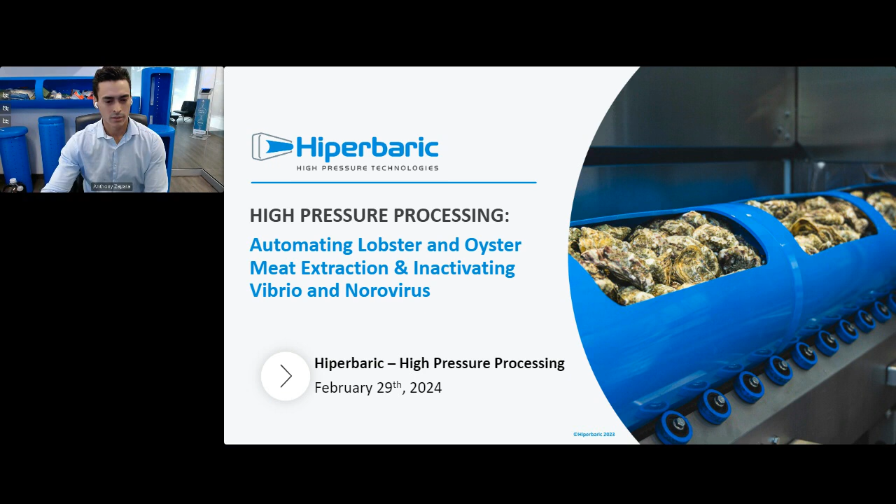So the agenda for today is I'm going to quickly highlight some processor seafood challenges that we've seen in the last two years. I'll give a brief introduction to how HPP technology works. We'll then dive deeper into numerous important information that you need to particularly have for the processing of lobster and oysters. I'll then share some commercial examples that exist on the market, and then we'll end it with an exciting shucking demo here at our pilot plant showing the meat extraction of oysters.

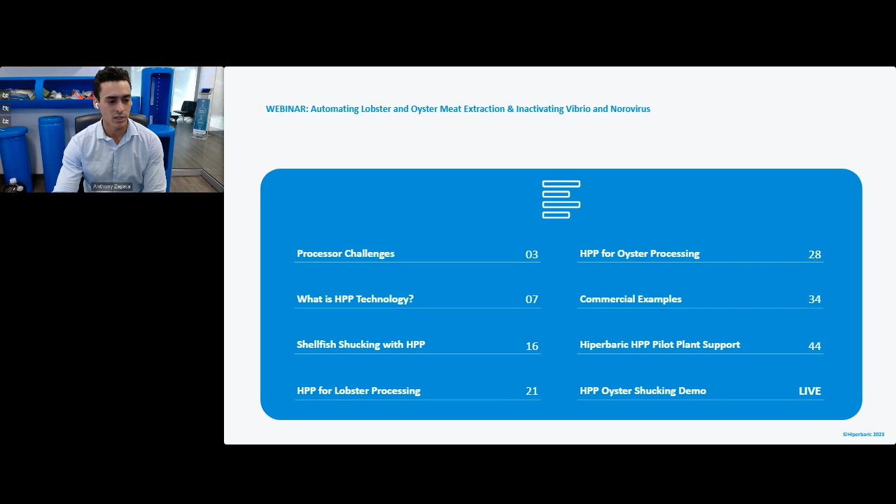Before we start talking about HPP, I wanted to point out two major processor challenges that we've seen in the last two years, starting off with the raw oysters, the challenges around raw oysters.

There have been numerous recalls specifically this year around Vibrio and Norovirus. Looking at the data, according to the CDC, 52% of foodborne illnesses are associated with norovirus here in the USA. When you look at Vibrio, there are more than 2,800 contaminations with this specific virus here in the USA. If you combine both of these, there are over 1,000 deaths.

So it's honestly a big challenge for some of the raw oyster processors dealing with this product. The other being labor, sourcing labor. Right after the pandemic, we've been reached out by numerous seafood processors, not only in the seafood space, but also across the board within the food processing sector. Sourcing labor has been a critical challenge.

If you take, for an example, an average shucking operator, which on average can shuck about a single oyster in 30 seconds, that's about 120 oysters per hour. And if you compare that with HPP equipment, our range of HPP machines, you can process between 10,000 oysters up to 95,000 oysters per hour.

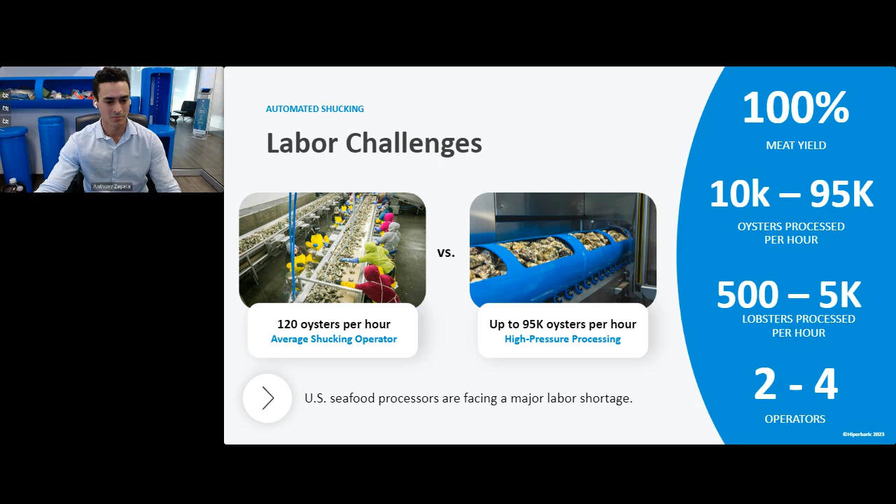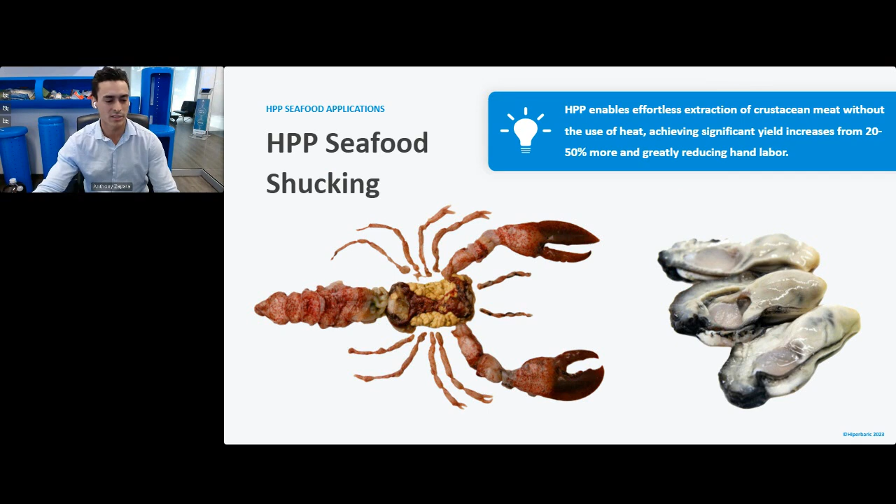So like I mentioned, HPP offers a solution to seafood shucking, both for crustaceans and oysters, and we'll be taking a deeper dive into that throughout the webinar.

So now let's take a step back and explain what truly is HPP technology, which is, in short, high pressure processing. HPP is a cold pasteurization method that uses both high pressure and cold water. It's based on the principle of isostatic pressure, meaning pressure is being applied at all equal sides, generally for post-packaged products. I'll play a quick video to show you what that looks like firsthand.

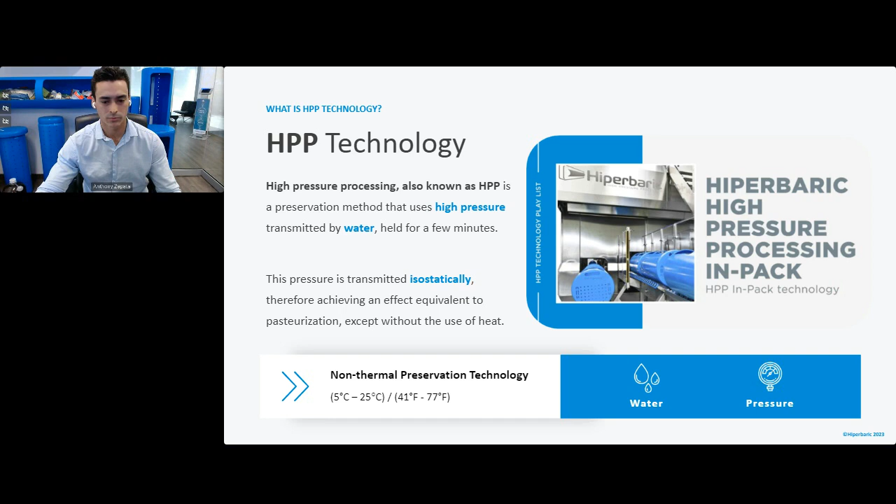High-pressure processing by Hiperbaric.

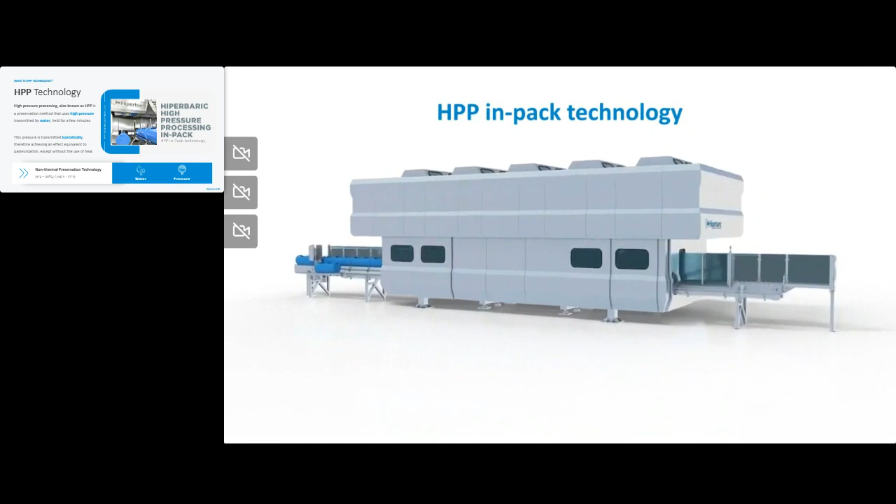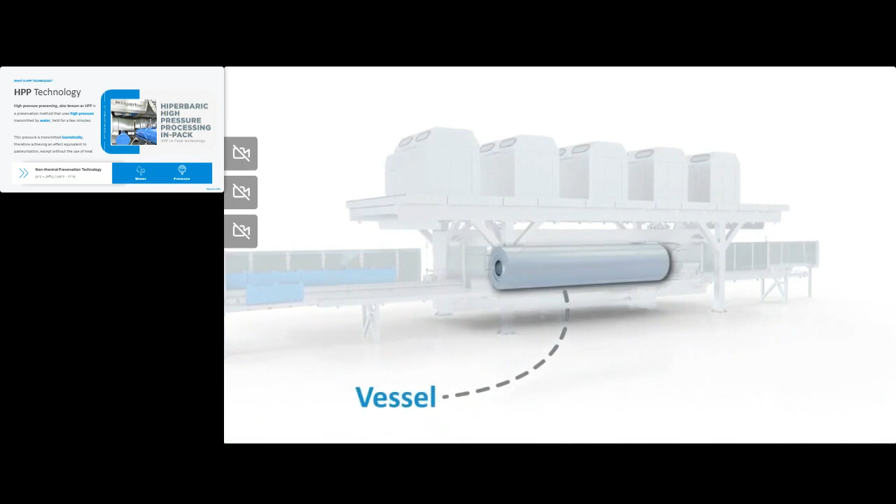Traditional HPP machines process in-pack products, generally in their final commercial packaging. The main components of a Hiperbaric in-pack machine are the conveyors, used to load and unload the baskets containing products, the vessel, where products are processed, and the plugs and wedges, used to close the vessel, all framed in a yoke that withstands the high pressure generated by intensifiers.

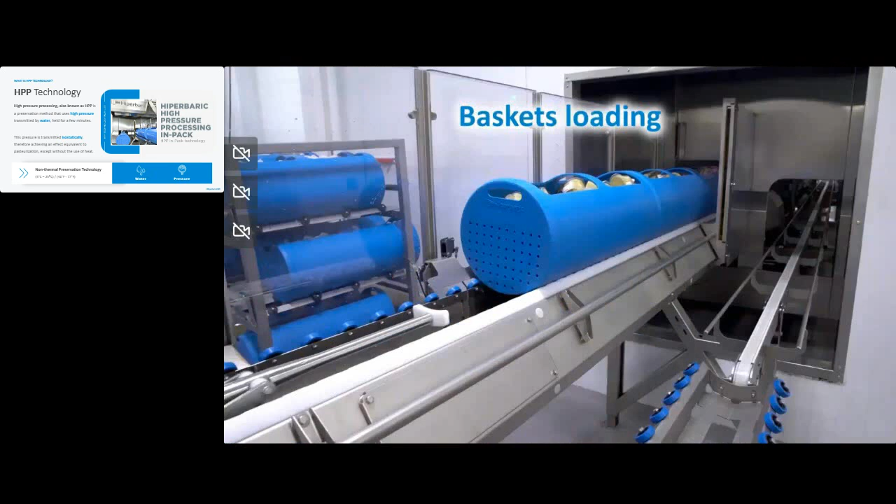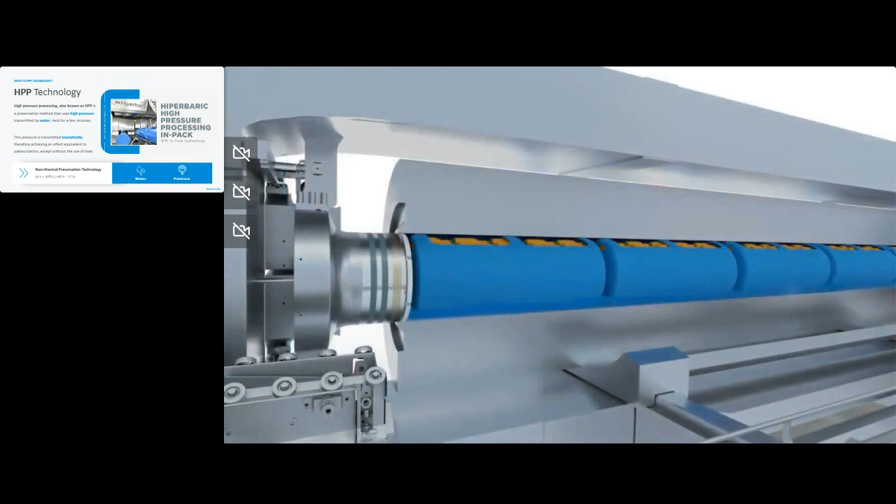A cycle starts loading packaged products in the baskets, which are introduced in the vessel. The vessel is aligned with the yoke and is filled with low-pressure water. Then it is closed at both sides by plugs and wedges.

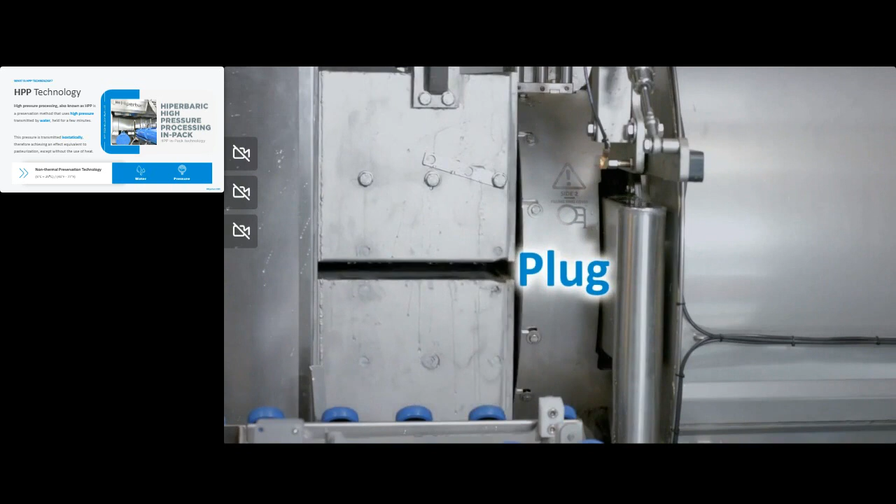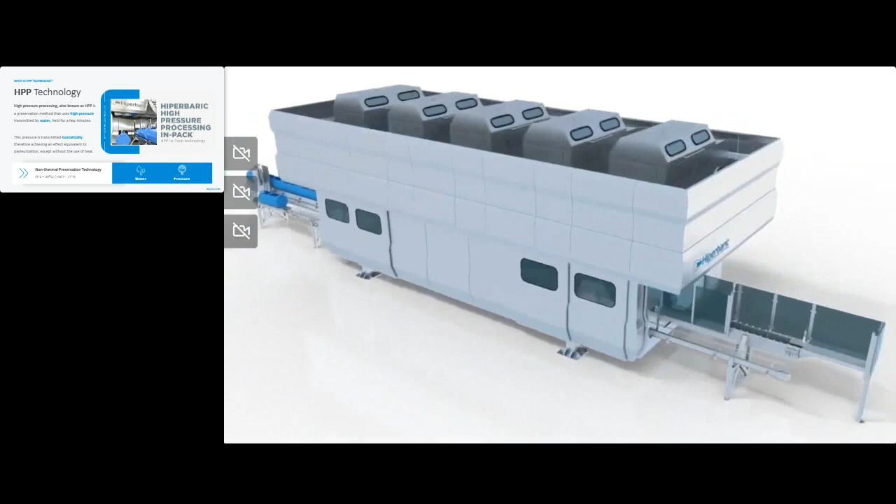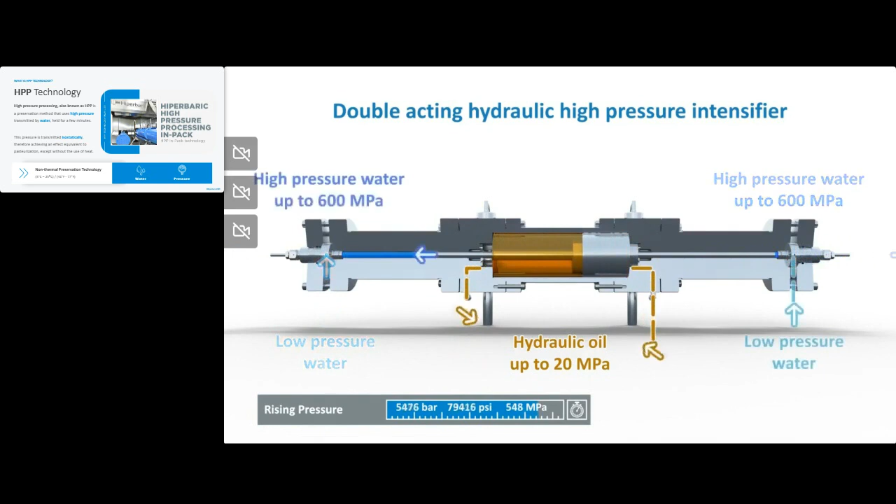High-pressure pumps start pushing pressurized water inside the vessel. Intensifier hydraulic oil pushes the piston, whose area is much larger than that of the plunger. Due to this difference of sections, the pressure of the water is intensified, raising up to 6,000 bar, 87,000 psi inside the vessel. Then pressure is held for a few minutes.

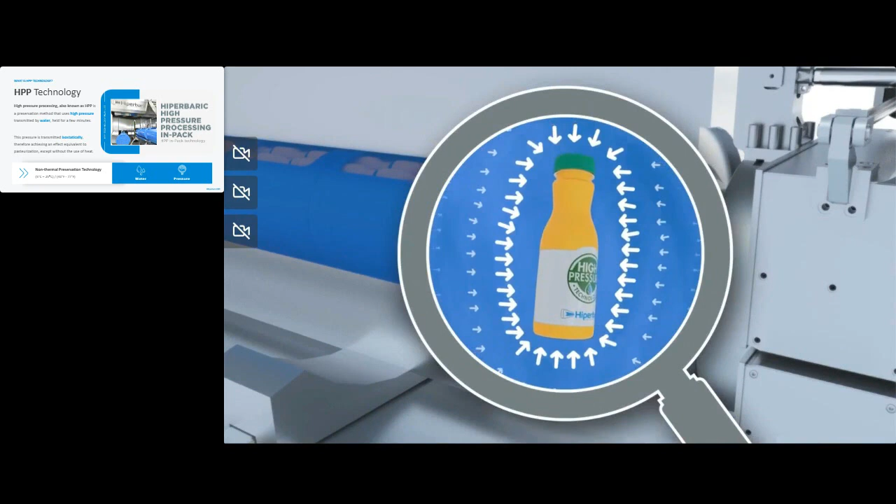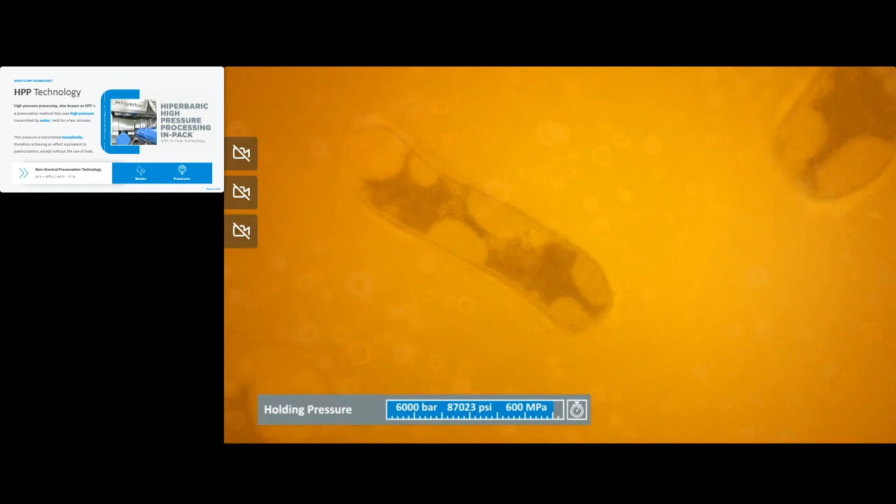HPP inactivates microorganisms without the use of heat, being respectful with the characteristics of fresh food products. Finally, the depressurization of the vessel and the opening of the machine take only some seconds. Afterwards, processed products are unloaded.

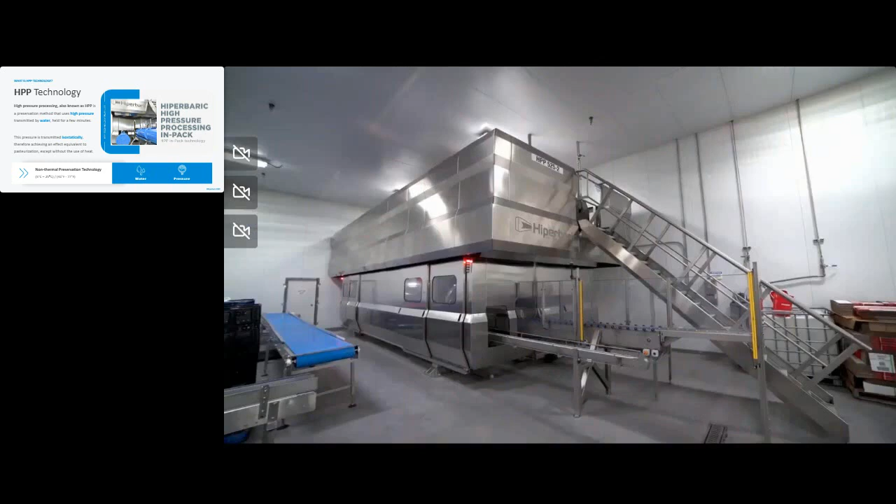High-pressure technology is applied to a wide range of products. The global HPP production is estimated at more than 1.5 million tons per year. Different kinds of packaging can be used. They must be water resistant and flexible enough to withstand the product volume compression of up to 20% and the total shrinkage of the headspace.

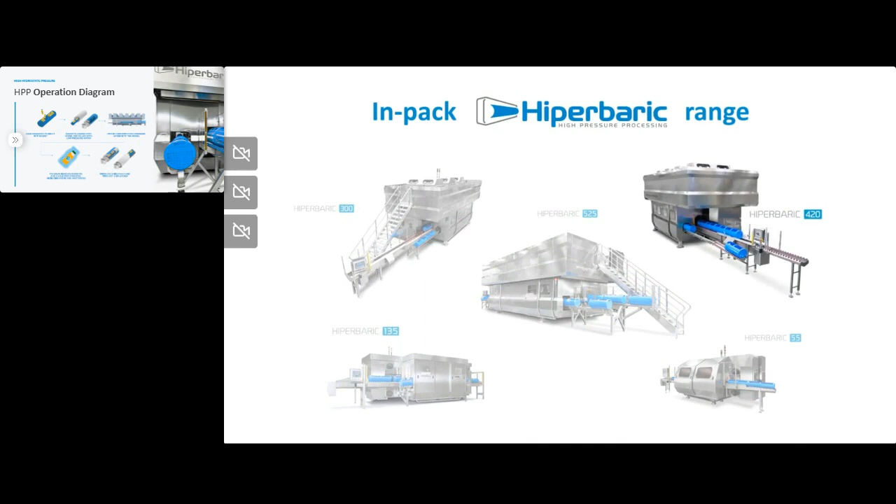Hiperbaric has the widest range of industrial HPP machines, being able to process from 250 kilograms per hour up to more than 3,000 kilograms per hour. To know more about high-pressure processing, please visit us at hiperbaric.com.

As you guys saw in the video, to recap, the process begins with generally post-packaged products being loaded into a basket. The basket then enters what we call the vessel. The vessel is filled with low-pressure water through the plugs on each end.

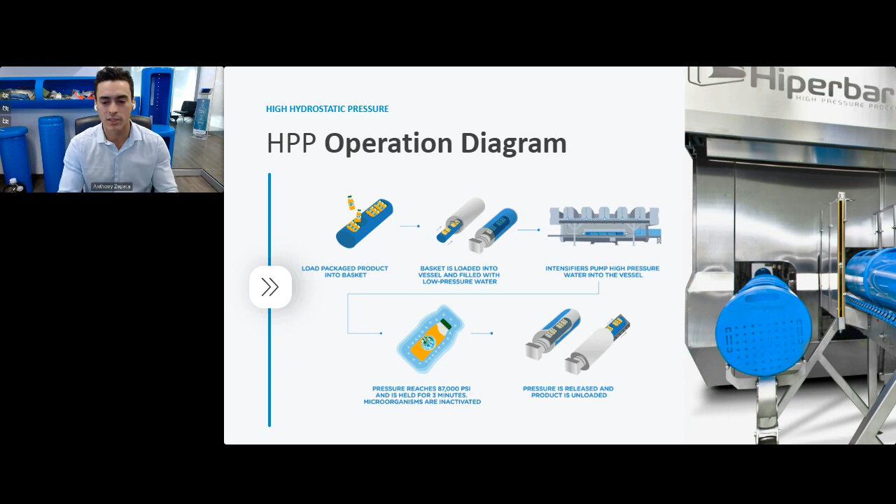We then have intensifiers apply high pressure. Once that pressure is reached, we apply isostatic pressure, which compresses the product on each end, on equal side ends, up to 15%. During this compression, a number of things are happening, such as the inactivation of pathogenic bacteria as well as spoilage microorganisms. Once that pressure finishes, we instantly decompress and the processed product can be removed on the other end.

When we talk about HPP machines, there are three major parameters that we need to be looking at. One, starting with pressure. All commercial HPP machines can go up to 87,000 PSI, which is equivalent to 6,000 bar, which is a whole lot of pressure. It's about 5 times more pressure than found at the deepest part of the ocean, the Mariana Trench.

Aside from pressure, another big parameter is the holding time. For generally post-packaged products, you're looking at about 180 seconds.

So this is the time that the pressure is set for. Once you achieve that pressure, we hold for that time that's inserted into the recipe. And lastly, you have water temperature, which most products are processed at about 41 to 77 degrees Fahrenheit. These pressure and holding times you see on the screen are usually for post-packaged products.

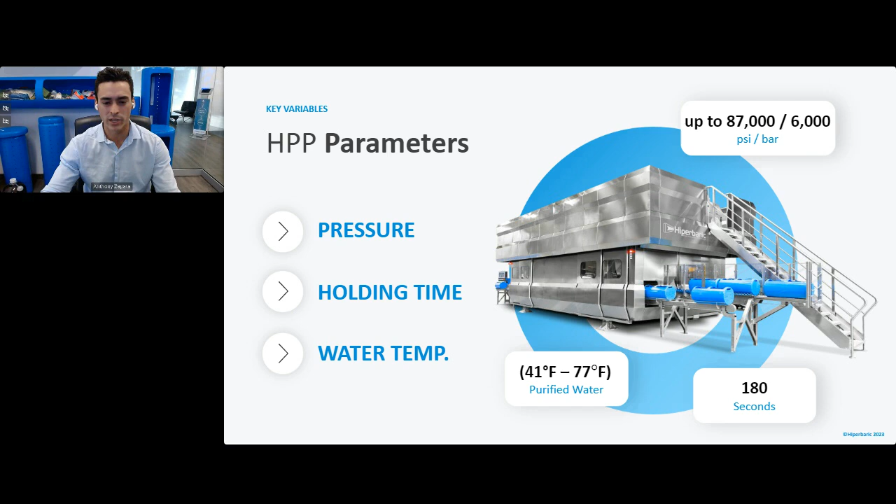Obviously, when it comes to seafood, you have the shucking application, which uses lower moderate pressures and lower holding times. I won't get too much into it because Daniela will be spending some time on it and giving you guys the recommended parameters to use for shucking.

So overall, HPP offers an innovative solution to enhance food safety since it inactivates foodborne pathogens such as Salmonella, Listeria, E. coli, as well as viruses such as Vibrio and Norovirus. It's an alternative to using thermal pasteurization since it's based on a cold water concept.

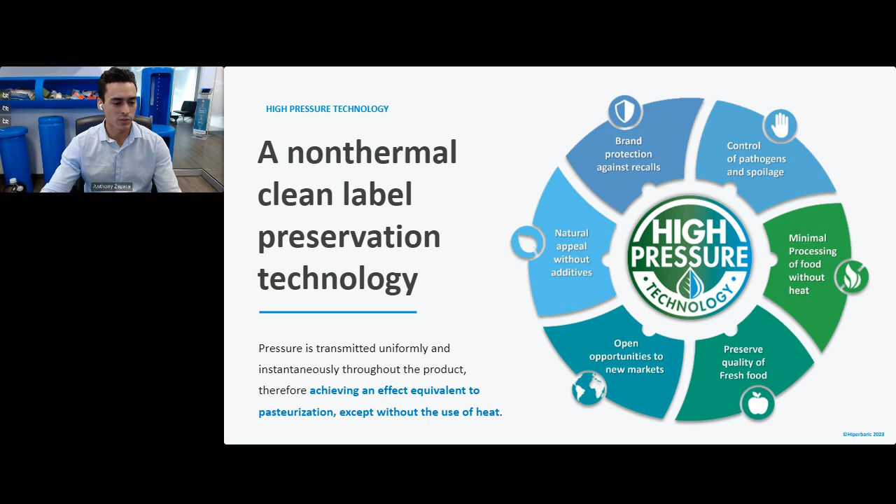With this being said, it also preserves the quality of fresh food. Through the inactivation of spoilage microorganisms, you also get an extended shelf life, which can open the door to new market opportunities and allow you to scale your business. And lastly, you don't need to rely on preservatives or additives for your product.

Some of the applications used with our machines include juices and beverages - think fruit and vegetable cold pressed juices and wellness shots. We have meat products, both ready to eat and ready to cook - think deli meats, cured meats, prosciutto, salami.

Within the avocado sector, you have guacamole, avocado pulp, and avocado halves. Within the salsas, plant-based, and fruit space, you have a number of dips, wet salads, fruit cups in their own fruit juice.

And another application that has recently been trending has been fruit and veggie and protein purees within the baby food sector.

Other applications include ready-to-eat meals, obviously seafood products, which is what we're going to be focusing on today's webinar, dairy products, which include yogurt, cheeses, and several dairy-based dips. We're also involved in the pet food space, mainly the raw pet food sector, as well as cosmetics and pharma for both nutraceuticals and a number of face masks.

Within the HPP seafood space, you have two major applications. You have the application of meat extraction, which can be applied to a number of seafood products, including lobsters, crabs, and several bivalves such as oysters, mussels and clams.

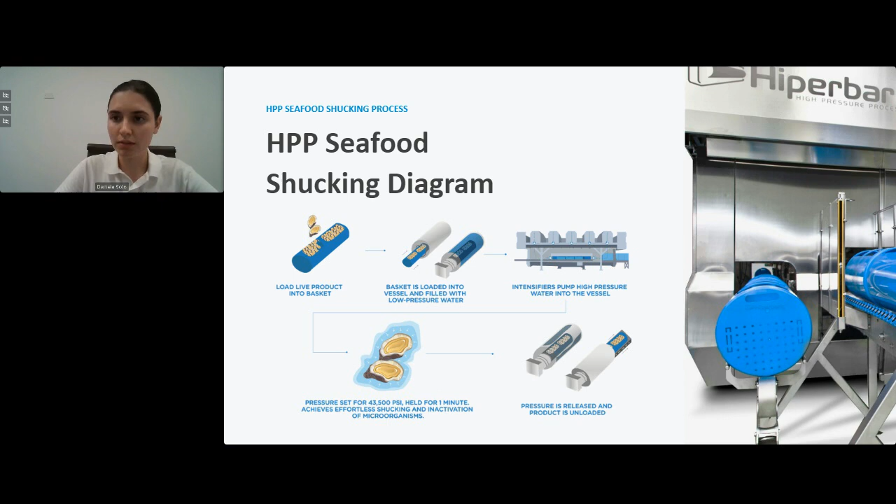Also, HPP can help ensure food safety by controlling Vibrio and Norovirus, which I'll explain further. And HPP can also help extend the shelf life of oysters up to 21 days without adding any preservatives, under refrigerated and controlled conditions.

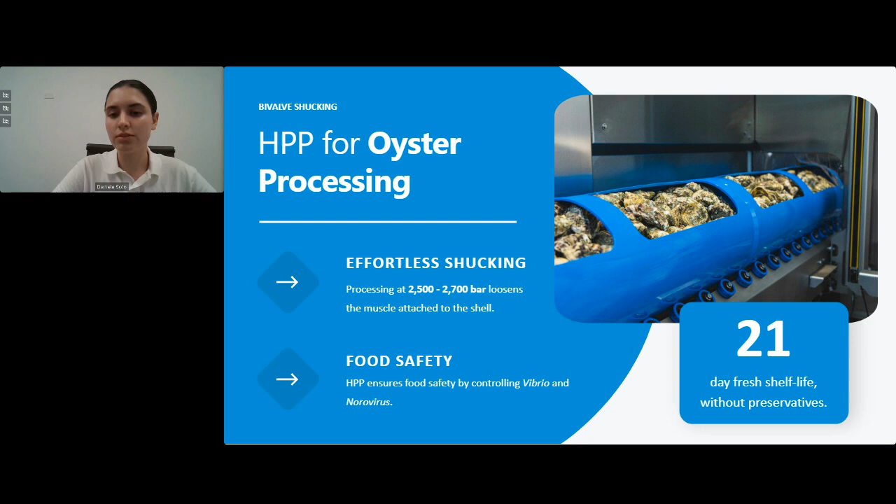However, they found that by applying higher pressures, broken shells could occur, and also a partial release of the meat from the shell could be obtained. So I want to emphasize this and tell you that to find the best parameters for oyster shucking, it needs to be reviewed in a case-by-case assessment.

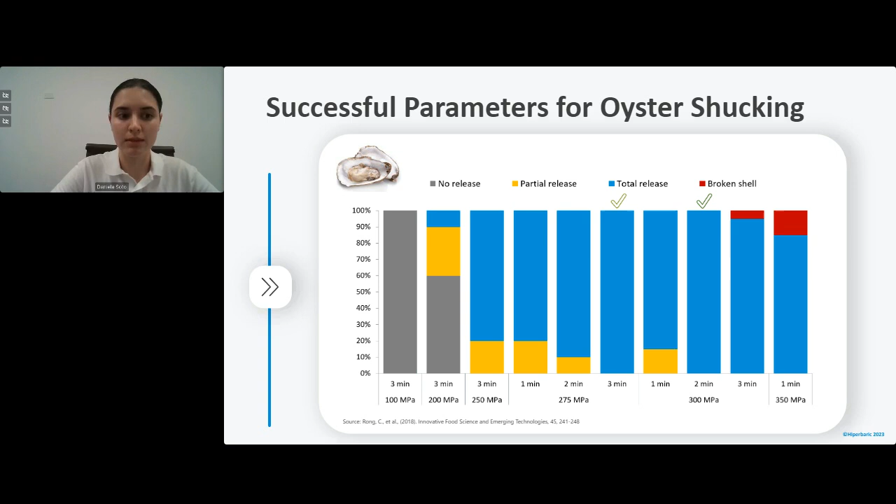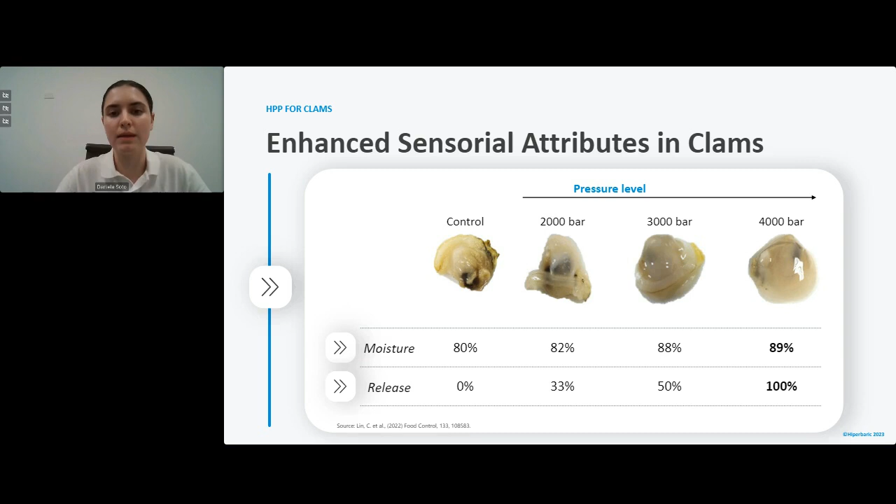HPP can also help improve some sensorial attributes when processing bivalves, such as in this case study with clams, where they found that by increasing the pressure level applied, the moisture content also increased. Additionally, by increasing the pressure, the total yield of meat extracted from the shell also increased. Again, this should be analyzed on a case-by-case basis, as shown here with clams.

HPP does not only achieve, but can significantly surpass, the reduction in Vibrio required by the Interstate Shellfish Sanitation Conference, or ISSC, which the FDA references when looking to reduce Vibrio levels. In the Seafood HACCP, published by the FDA, they mention that a reduction of 3.52 log should be obtained.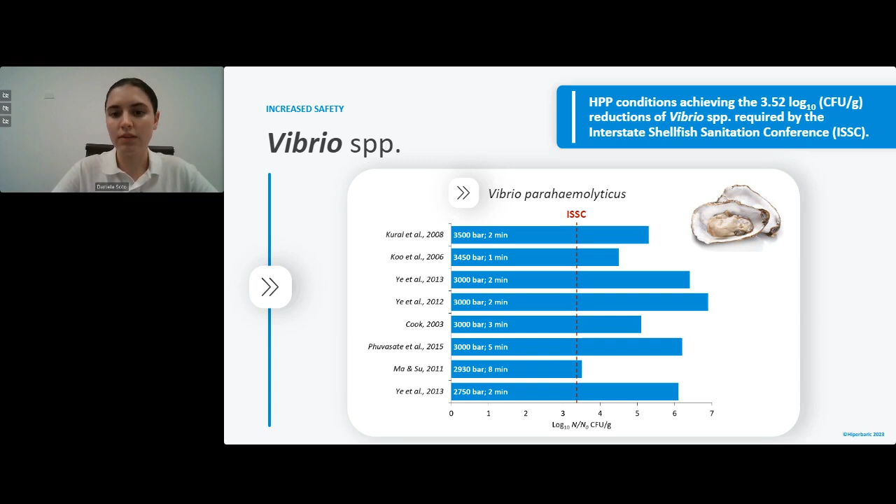In other words, Vibrio and Norovirus are not a worry when using HPP as a food safety measure, since it can help eliminate them to safe levels.

I want to share with you some oyster commercial formats in which you can present your HPP oysters. The first one is the banded in-shell oyster, where you place a rubber band around the oyster in order to maintain it closed during pressurization and depressurization. This way, the consumer can have the experience of performing the meat extraction from the shell by themselves.

The next format is the half shell one, where oysters are placed on a tray and the top shell is removed, and then it is skin packed under vacuum. This will help prevent the meat from moving from the shell, and it will also give this value-add appearance of showing how the meat looks inside the shell, to show the consumer how it is.

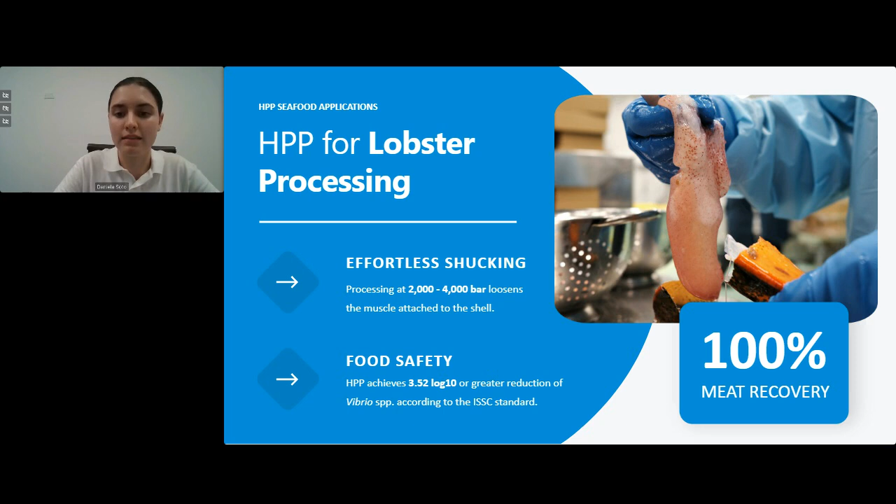I want to make a recap on the importance of using the correct packaging material when processing HPP seafood products. It needs to be a 10K OTR plastic material in order to meet what the FDA guidelines ask for in the Seafood HACCP. It is well explained there, and this will help ensure food safety.

Now I want to show you this case study where consumer acceptance was analyzed in sous vide cooked lobster tails that were further processed with HPP. They found that after processing with HPP, these samples showed no significant differences when looking at changes in sensory scores between the unprocessed and HPP processed lobster cooked tails. They analyzed aroma, appearance, texture, and flavor, and found no significant differences between the unprocessed and HPP processed samples.

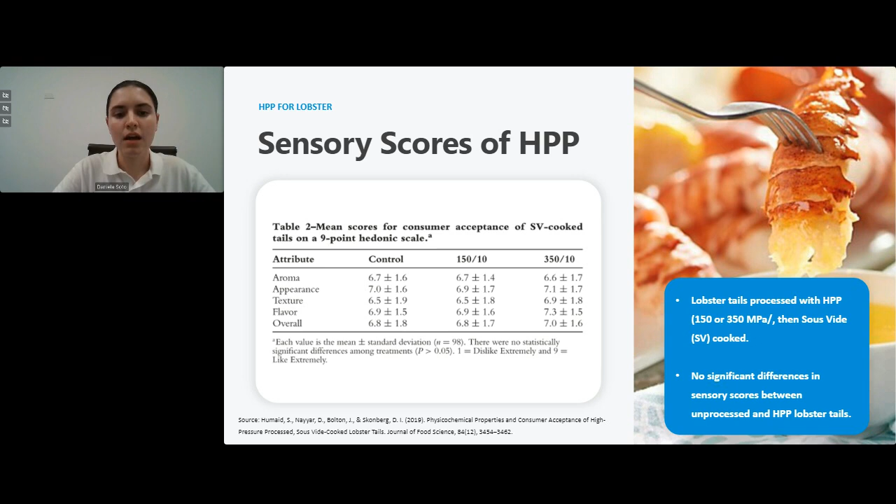They also grouped the main sensorial descriptors when looking to describe texture, and found that HPP lobster tails were associated as juicier and firmer more frequently, which helped increase consumer acceptance. They also saw that the unprocessed cooked lobster tails were more consistently perceived as soft or mushy when talking about texture.

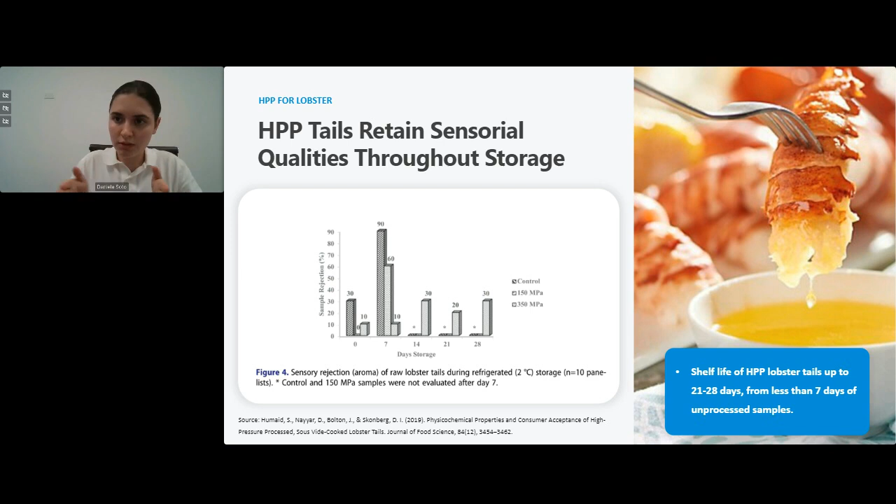Finally, in the same case study, HPP lobster tails had a higher acceptance throughout the shelf life. As shown in the graph, throughout the 21 to 28 days of increased shelf life under refrigerated storage, consumer acceptance remained higher, in contrast to the unprocessed samples, which started to obtain higher rejection levels once they reached 7 days. So by increasing the shelf life, you can still preserve the sensory attributes that remain throughout the shelf life.

I want to share another case study where raw lobster tails were analyzed for freshness throughout their shelf life. They analyzed the total volatile base nitrogen compounds, which are an indicator of freshness. They observed that the HPP samples remained under the detection level for these compounds, in contrast to the unprocessed samples, where these compounds increased throughout the shelf life. However, the HPP ones remained fresh. This is mainly attributed to the effectiveness of HPP in inactivating deteriorative microorganisms, which are mainly responsible for producing these compounds that deteriorate seafood products.

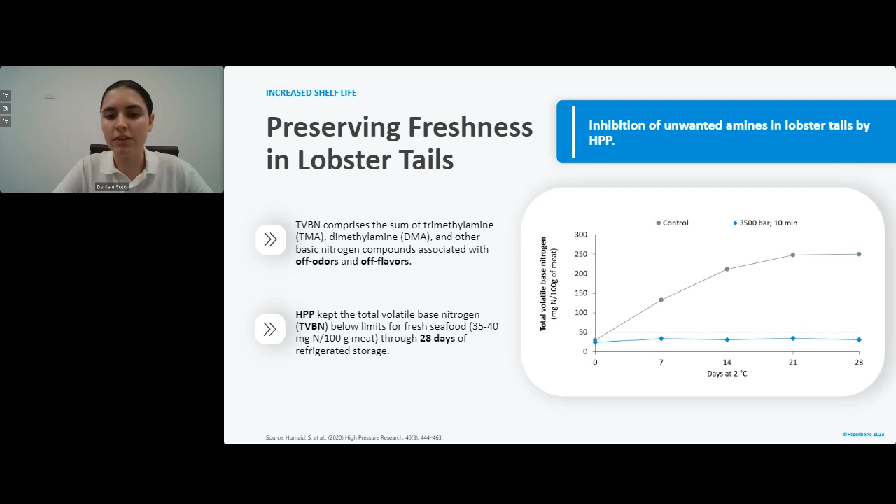Finally, I want to share with you some commercial formats in which you can commercialize your HPP lobster products. The first one is the whole or split lobster. This one is presented this way so that the consumer can have the experience of peeling the shell from the meat, and also have the culinary experience of having the lobster already cut in halves.

The second format I want to share is the raw or cooked knuckle and claw meat, which is packed under a 10K OTR plastic material.

This is very important to remember. The consumer can just open the bag and consume their product if it's cooked, or even if it's raw, however they want to consume it.

The third commercial format is the raw or cooked lobster tails, in which the lobster tail can be presented already peeled off or already with the shell on, so the consumer can have the experience of peeling the shell from the cooked lobster tail.

So I'll now hand it back to Anthony. Thank you, Danny. Appreciate that insightful presentation.

Now we'll jump into lobster and oyster HPP commercial examples from some of our customers and seafood companies leveraging the technology. I'll quickly give an overview so we can save some time for the shucking demo.

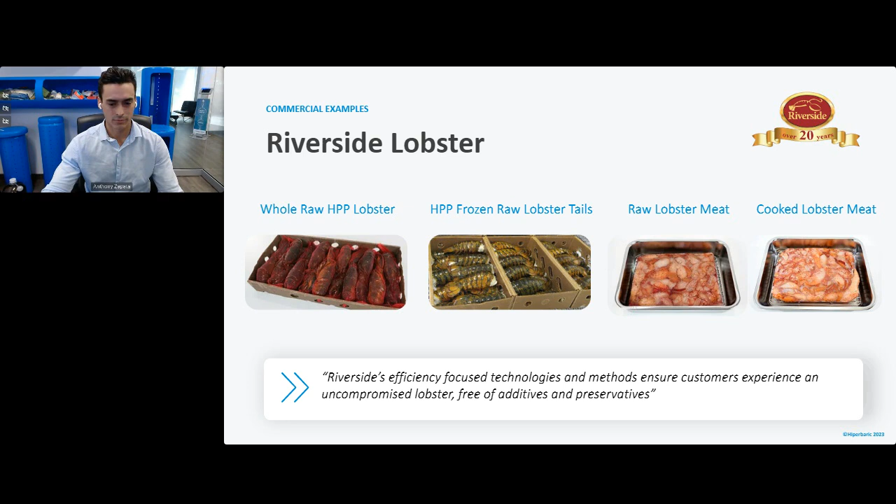Next up, we have Cinq Degrés Ouest, the pioneer in high-pressure seafood processing in France and Europe. They use HPP primarily for the meat extraction process.

They process both raw lobster meat as well as oysters, but also other applications such as langoustines and cockles. In this slide, you can see their lobster process, where they maintain the lobster in the same conditions it would normally be alive in.

From there, they go into the HPP machine, where they're instantly killed in the most humane way possible. From there, they're shelled into different pieces.

The meat is removed, then it goes under a nitrogen freezing process within 30 minutes of deshelling to preserve peak freshness. From there, it's vacuum packed, graded, sent off to storage, and distributed.

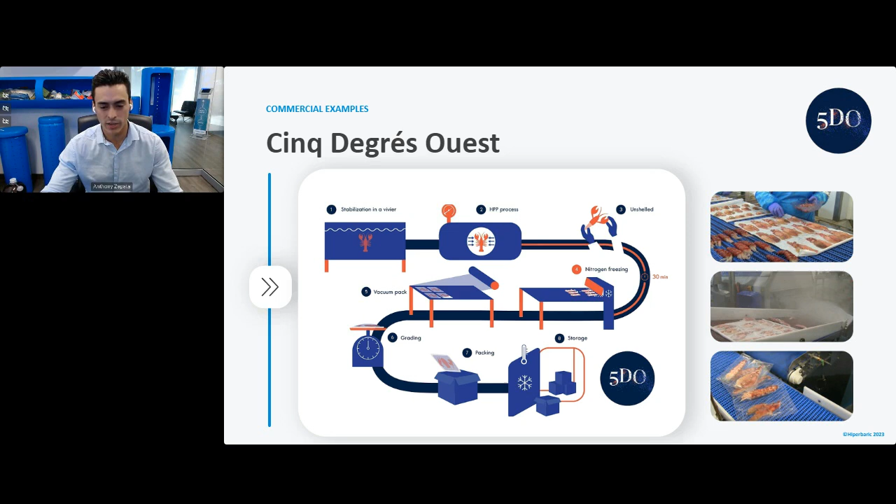On the right side, you can see some images at their manufacturing facility. Next up, we have our customer Greenhead Lobster, based out of Stonington, Maine. They actually have their HPP processing facility about an hour away from the docks.

I won't spend too much time talking about them since we have a pretty neat video that walks you through their manufacturing facility, which I'll play now.

Stonington, Maine is the home of Greenhead Lobster, the largest lobster port in Maine and a family-owned business since 1997 that focuses on one product, wild-caught fresh lobster.

Lobster in Stonington is a way of life. Our lobsters are harvested by a dedicated fleet of lobster men and women, many of whom have been delivering their daily catch from the waters of Penobscot Bay to the Greenhead Lobster docks for generations.

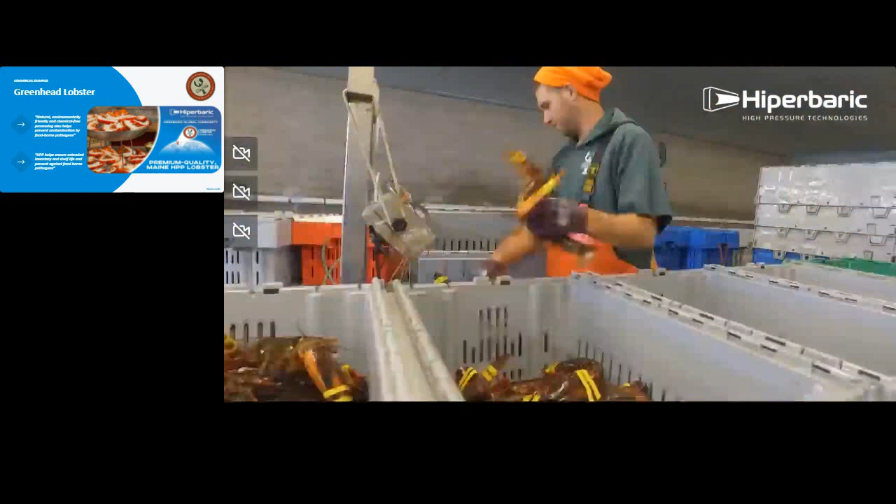Lobster is different in Stonington. We are lucky to live where we live and have the clean water, dramatic tides, and ideal temperatures for great-tasting lobster. It's our mission to offer the highest quality lobster.

Lobster technology has changed dramatically in the past 10 years. We've been at the forefront of innovation by implementing high-pressure processing technology. It's the only technology that meets Greenhead Lobster standard.

Using our state-of-the-art HPP facility, we can retain the same sweet flavor, texture, and taste of the lobster from the day it was harvested.

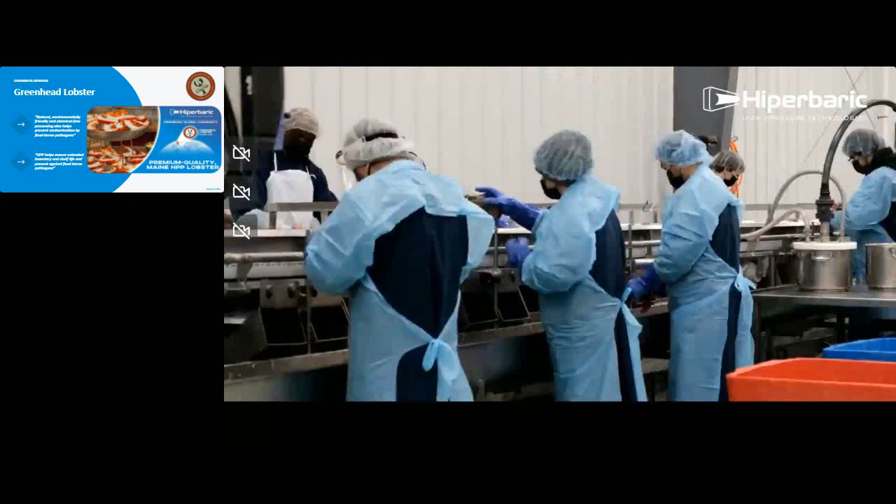HPP also allows us to separate 100% of the meat from the shell, increase the total meat in lobster by up to 80%, and ensure food safety by eliminating foodborne pathogens. The cold pressure technology also increases productivity and maximizes labor usage while offering a tastier, premium quality with an extended shelf life.

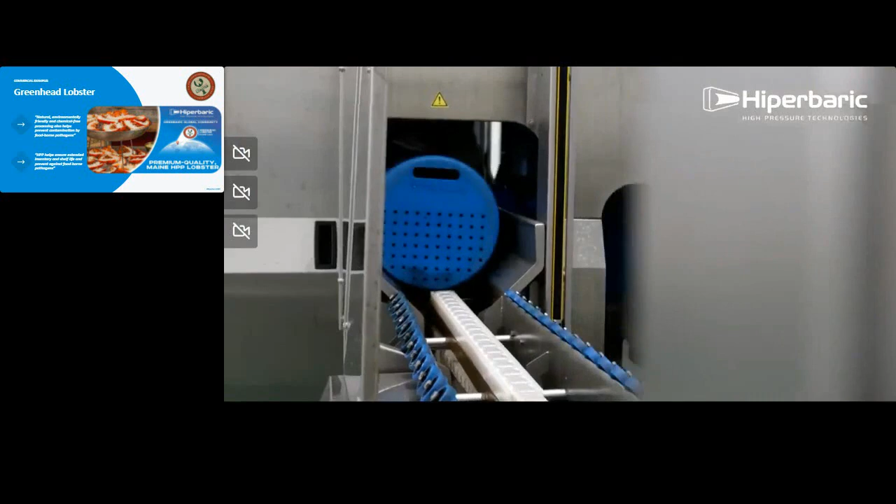So how does HPP work? HPP is a non-thermal technology that uses cold water at extreme high pressure, about 5 times more pressure than found at the bottom of the ocean.

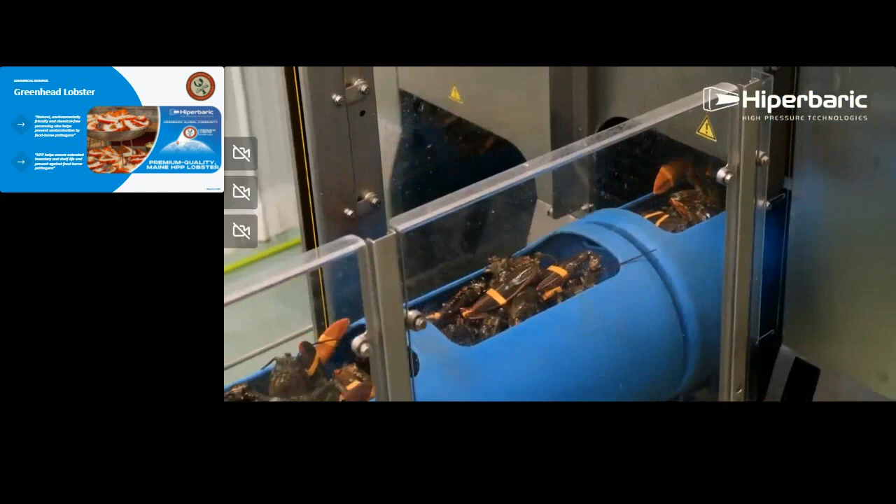Live fresh lobsters are placed into containers, which are then pushed into the HPP unit for 2 minutes. The high water pressure breaks the connective tissue that bonds the meat to the shell and allows for the meat to be easily recovered. Since no heat is involved, the innate flavor, texture, and nutritional properties of the lobsters are preserved.

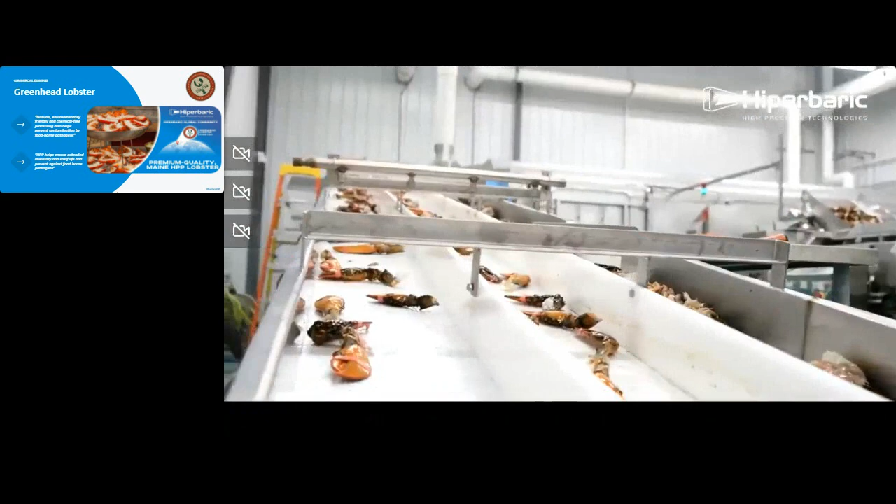This allows for a fresh, out-of-the-ocean, all-natural tasting experience. After the initial HPP, the lobster is divided into parts and offered in tail packs with or without the shell.

Then the claw and knuckle meat is further HPP to 87,000 psi, which extends our shelf life from 10 to 18 days. Without the use of heat, HPP ensures our customers that we're providing them with the highest quality product by the time it reaches their doorstep.

The partnership with Hiperbaric is an essential relationship in our business. We're unique in that our process line starts with Hiperbaric, which really identifies the products of Greenhead Lobster, our raw, frozen, and cooked lobster products. So Hiperbaric is an essential part of Greenhead Lobster.

Quick shout out to Greenhead Lobster and Hugh Reynolds, who leads that operation up in Stonington, Maine.

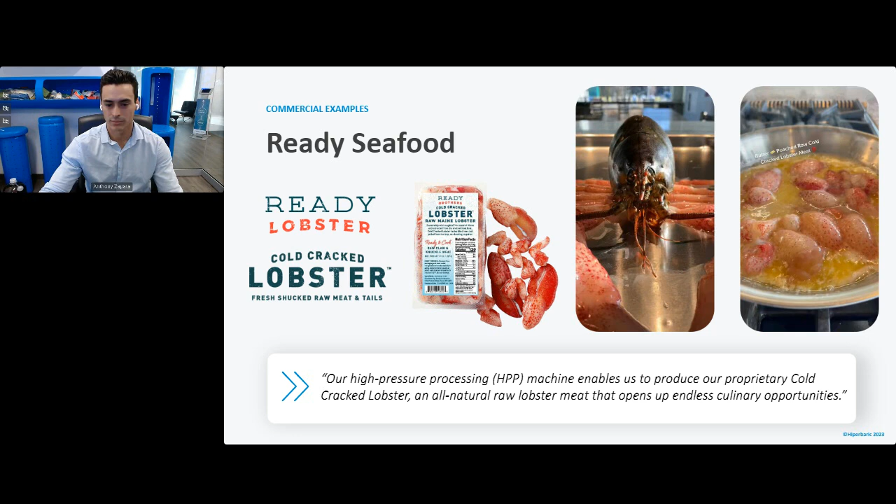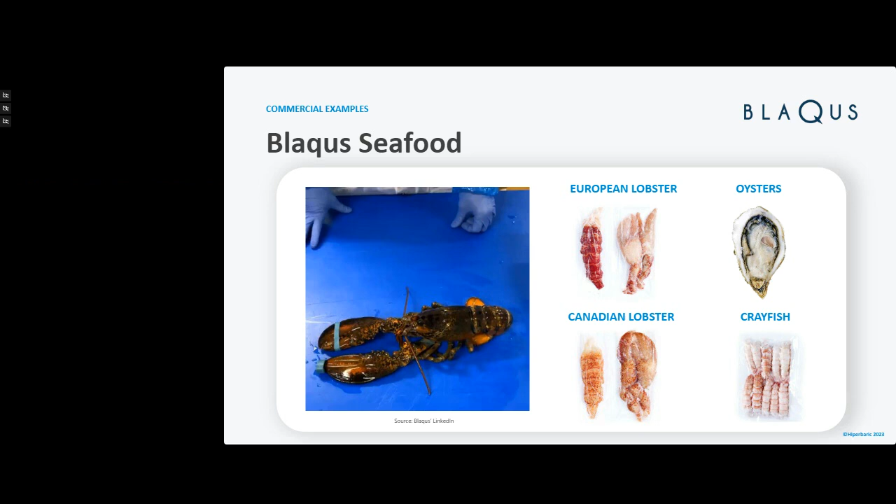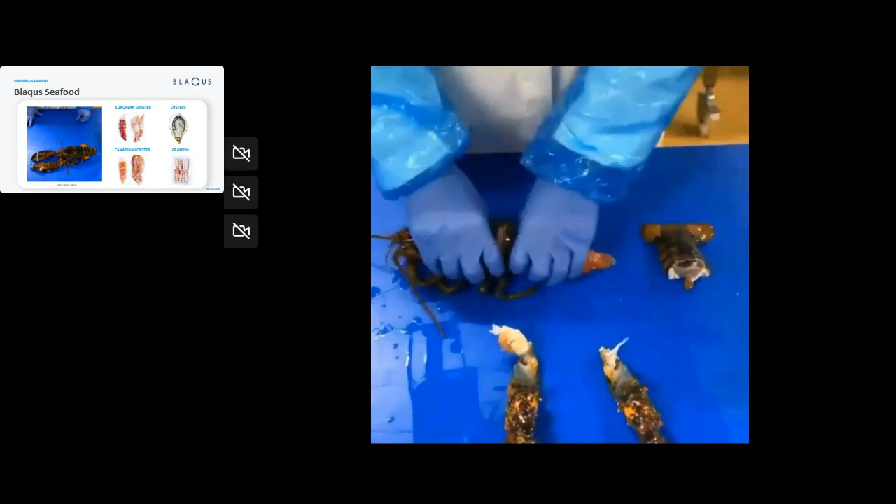You see after HPP, they're separating the claw and knuckle portion of the lobster, detaching the tail from the lobster. As you can see, it's an easy and effortless shuck. The meat is fully detached from the shell. From there, you can easily pull away the tail meat. The claws do take some cracking. A slight crack will open up that shell. And then from there, you have an absolute 100% yield, easy extraction of the raw lobster meat.

That final portion, you can see the lobster in its entirety.

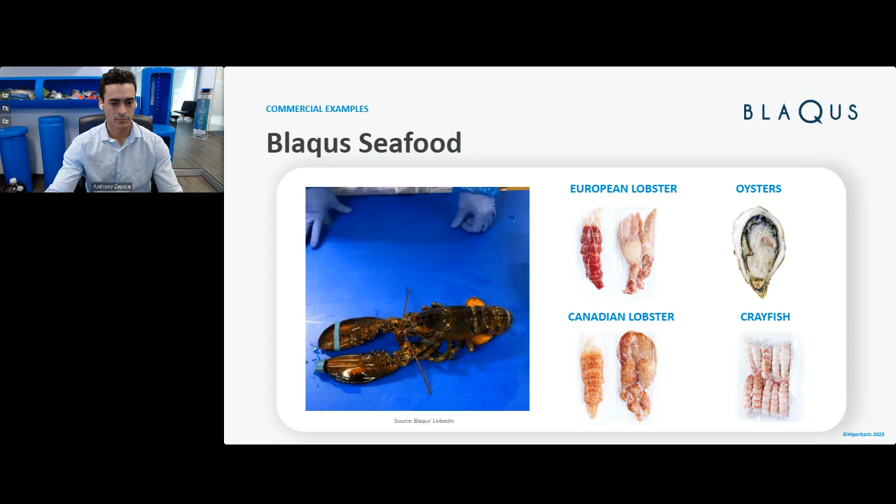I'll now move along to highlighting some of our HPP equipment and offerings. From there, I will mention some of the support services that we offer here at Hiperbaric, and then we'll dive straight into the shucking demo portion of the webinar.

So our In-Pack range includes 5 different model sizes. They all function the same. They could achieve the same pressures, which would be 87,000 PSI, which is equivalent to 6,000 bar. From smallest to largest, on the top left, you have your Hiperbaric 55 liter machine. Next to that is the 135 liter. On the bottom, from left to right, you have the 300, the 420, and our largest machine, the 525 liter machine. Hiperbaric is the global leader in HPP equipment with 65% market share.

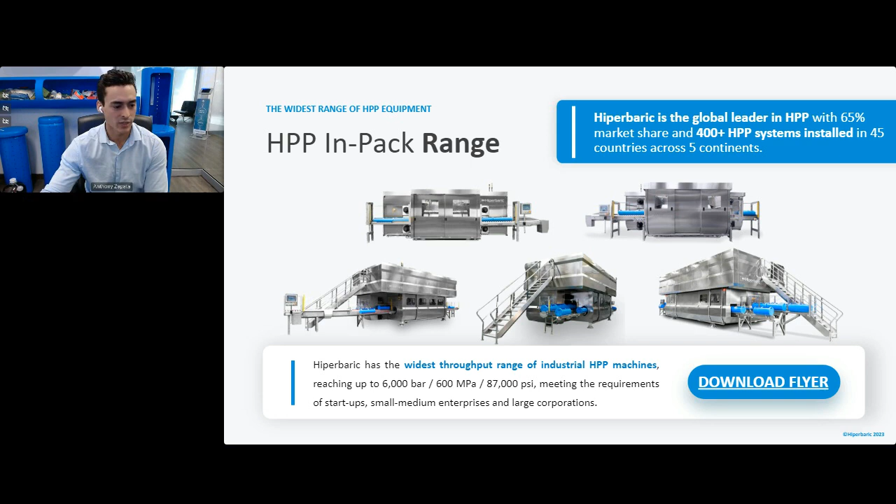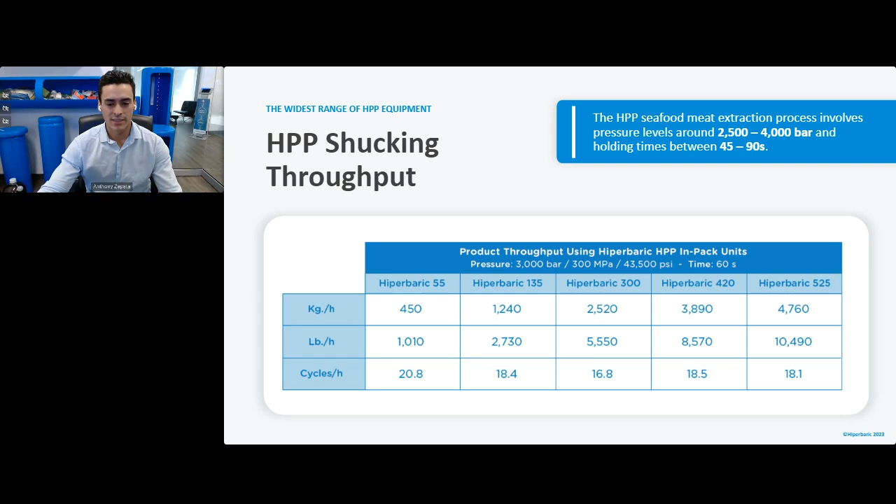We've installed over 400 systems in 45 countries across 5 continents. In terms of productivity, it's going to be based off, obviously, the parameters used, which are pressure and holding time. But if we use the average, which would be 3,000 bar for 60 seconds, our smallest machine can shuck about 1,000 pounds per hour, up to our largest machine that can do around 10,500 pounds per hour.

I do want to mention a humble brag, but Hiperbaric was the first to market and industrialize the horizontal HPP machine. Prior to that, there were vertical machines on the market, but we thought there were many advantages to a horizontal design, including improved traceability, where you're loading on one end and unloading on the other. It's a more ergonomic design where you can both load and unload at waist chest level of the operators. And it makes it a whole lot easier when it comes to maintenance.

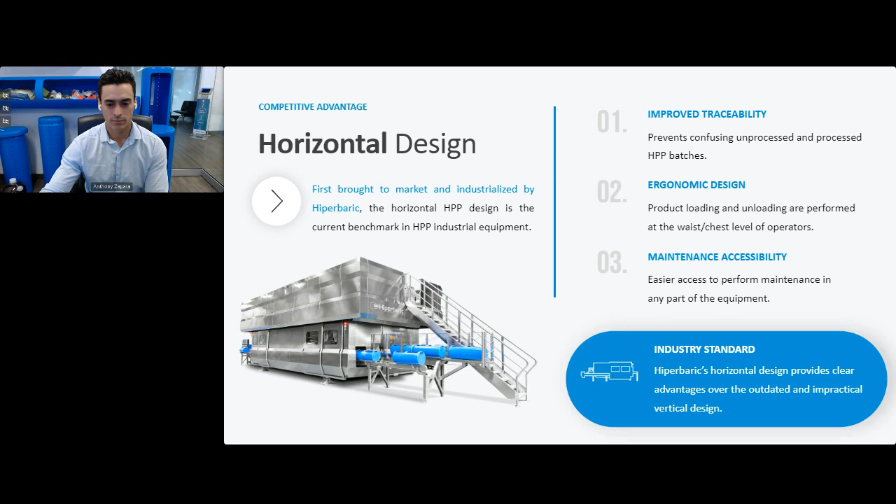Lastly, I do want to mention that we have 2 pilot plants, one here in Miami, Florida, where Daniela and myself are based out of. We also have a pilot plant in our headquarters in Burgos, Spain. We have a team of food scientists that can provide support from product development, giving you packaging recommendations as well as processing parameters. They can help with food safety regulations and provide guidance on validation and shelf life studies.

Our applications team consists of 5 food scientists, 3 of which are doctors and process authorities and have more than 20 plus years of experience in the HPP industry. If you have any technical questions whatsoever, you can reach all of them at the email apps@hyperbaric.com. So some final remarks.

Going back to the theme of today's presentation, obviously when it comes to challenges within the seafood sector, top of the list come up food safety and sourcing labor.

We think HPP is a perfect solution to help some of these challenges that seafood processors are facing, starting with the food safety benefit, where HPP can be used as a tool to inactivate numerous pathogens, spoilage microorganisms, both Vibrio and Norovirus. It provides a solution for effortless shucking. It's a completely 100% natural process, and you also get the benefit of shelf life extension.

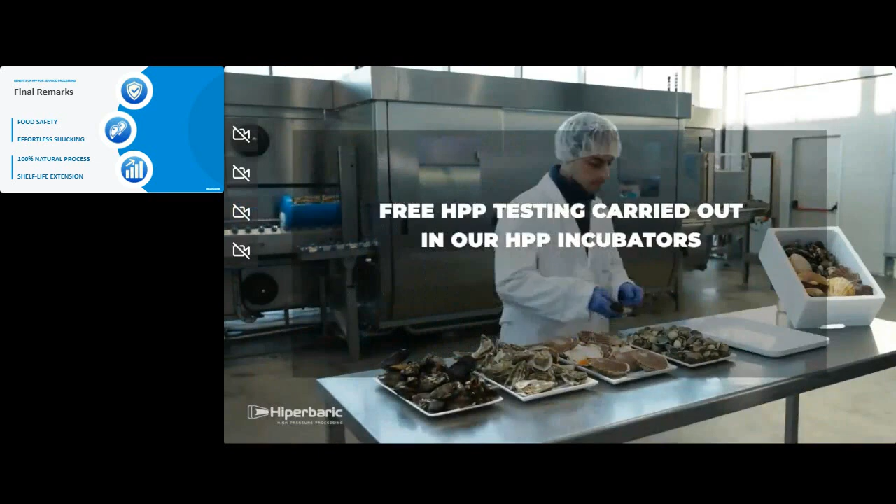All right, so welcome to our Hiperbaric HPP pilot plant in Miami, Florida. Behind me, I have our 55-liter machine, which is our smallest unit. Right behind me, I have loaded clustered oysters into our baskets.

These oysters have already been shucked. I did want you guys to see them. Here we have Pacific oysters, which have already been processed in the machine under two different recipes, one being 50,000 PSI for 2 minutes, and another being 43,500 PSI for 2 minutes. I'll allow now Daniela to show the meat extraction process from these oysters.

Thank you, Anthony. So here we have some Kumamoto oysters that were retrieved here in the US and the Pacific. And here I have these oysters that are already shucked. These ones that Anthony just mentioned were processed at 50K PSI for 2 minutes, the highest pressures. And as you can see, it was very easy to open the oyster. And now, just by pushing the meat, it's extremely easy to perform the extraction.